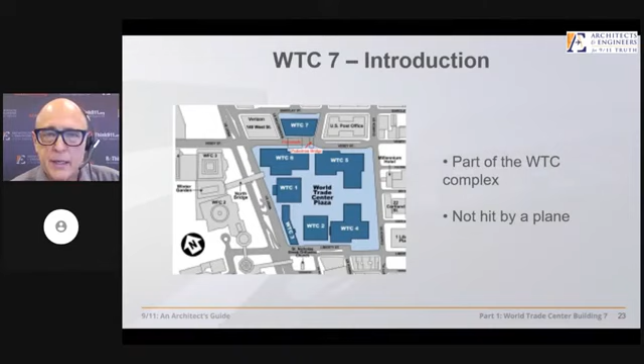It's a 47-story skyscraper, about a football field away from the North Tower. It was not hit by an airplane. This is not an insignificant building. It's the tallest building in most of our states. Here it is, just across the street from Building 6, just outside the zone of the super block called the World Trade Center. But it is part of the complex.

Now, it's certainly a notable building, and as you see here, it is still standing after the collapse of the Twin Towers. It was hit by some of the debris from the towers, and it collapsed nevertheless, as I mentioned, in 7 seconds. Let's just look at that collapse. See what happens here.

And it's 6 seconds prior to the overall collapse. You see the east penthouse collapse, and then the whole building comes down, actually smoothly, uniformly, in terms of its collapse. The internet slows it down somewhat. But we're going to get into this.

But first, what's the official story tell us about this? Here's Shyam Sunder from NIST. What we found was that uncontrolled building fires caused an extraordinary event. The collapse of World Trade Center 7 was primarily due to fire. Primarily due to fires. What fires?

Well, these fires. They're few, they're small, and they're scattered. As you can see, these are the worst fires that we have photographic or video evidence of in these buildings.

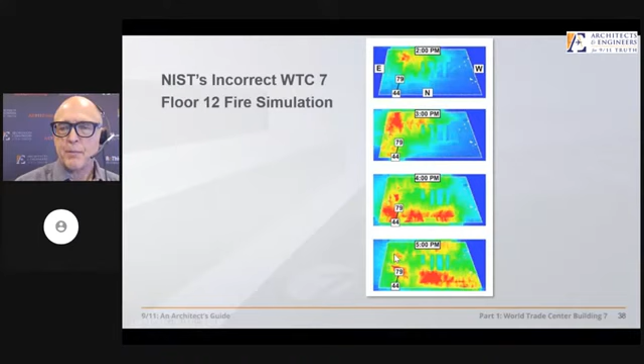That's a problem for a few reasons. One is that they contradict themselves - the fires don't last in any one location for more than 20 or 30 minutes. So how's that fire hanging around column 79? Also, the photos show that fire is gone in that area well over an hour, up to an hour and a half, before the collapse of this building. So fires could not have caused the collapse.

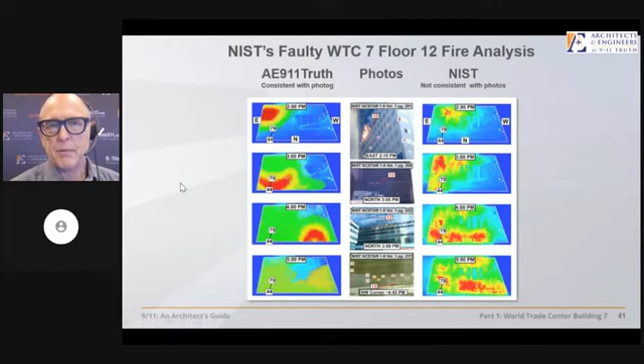More likely, those fires were moving through - they're around column 79 according to the photos about 3 p.m., and then they're moving on. By 4 p.m. they're well toward the west and gone by 5 p.m., which is even 20 minutes before the collapse. So we already have a series of significant problems associated with the NIST report.

But let's go on with the official story here.

Our study has identified thermal expansion as a new phenomenon that can cause the collapse of a structure. For the first time, we have shown that fire can induce a progressive collapse.

Okay, for the first time, a brand new phenomenon. You can see on the screen, the column at the very right is column 79. That's the column that first buckles, causing the floors to come down, followed by a quick succession of failures of adjoining columns. So there's a whole series of events that happen here around the 12th to 14th floor that cause this collapse. What's their theory?

These long span beams are heated up for the hour and a half prior to the building's collapse, pushing this girder off of its seat on column 79, allowing floor 13 to fall on 12, which causes a progressive collapse - 12 on 11, and so on for 9 floors - resulting in the collapse rising all the way up to the top of the building in this instability, and then traveling laterally across the building as it comes down at free fall acceleration, which we'll get to.

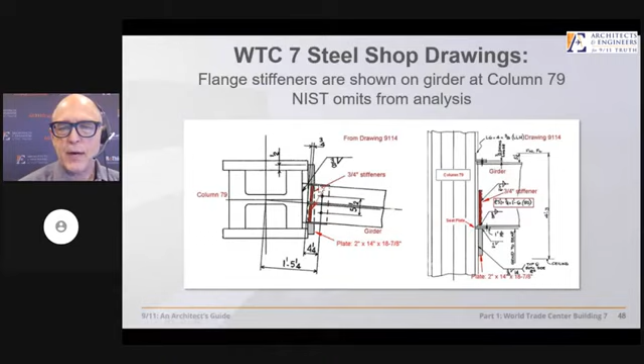Why? Because this side plate here would have trapped that girder because it expands, and it's been shown, as I'll show you at the end of this presentation by Professor Hulsey of the University of Alaska, that this side plate would have trapped that girder from ever coming off. But let's say all that could have still happened.

What do we have next? The 13th floor falling on the 12th. And so...

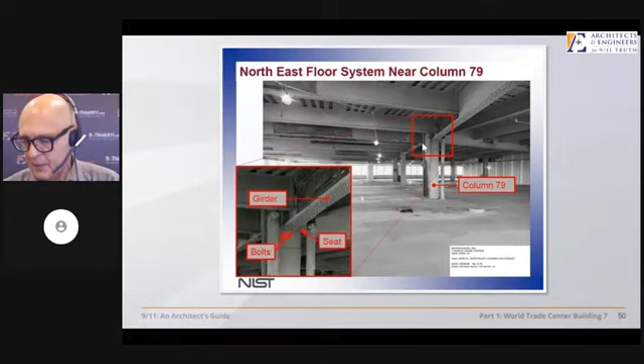And the 13th floor falling on the 12th would not have had even a third of enough shear force to impact the 12th floor below and break that shear connection, because there's a girder just like this on the floor below that it would have had to sever those connections in order to start a progressive collapse.

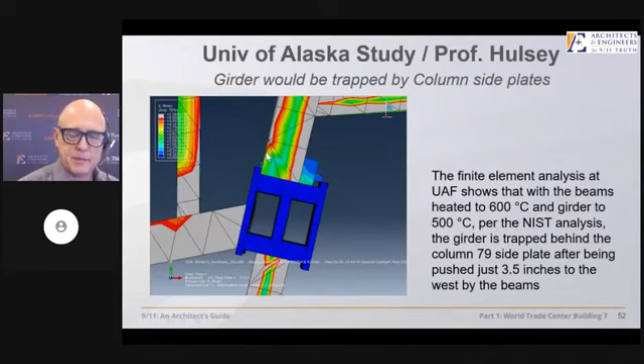Well, that's proven to be impossible by the University of Alaska in a 3-year, $400,000 study by Professor Hulsey, one of the top forensic structural engineers in the country, in which he shows that girder would have been trapped on that side plate because it expands as it's being heated up under the NIST scenario. He shows that indeed these beams couldn't have expanded toward the girder at all, because the heat is causing it to move toward the exterior wall.

We'll come back to that. Again, 632,000 pounds required in a dynamic force to break the floor 12 girder, but we only have 166,000 pounds available to do it with.

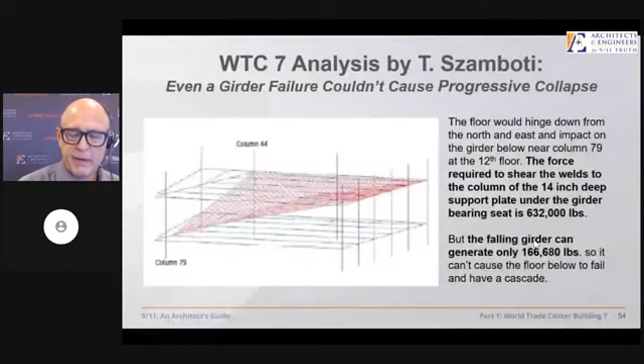And NIST notches all of their beams and causes their almost simultaneous failure in their computer model, in their effort to try to prove their initiation of collapse and total progressive collapse theory. That's how they simulate the fire damage, by destroying all the beams at once. No, fire doesn't do that, though, does it?

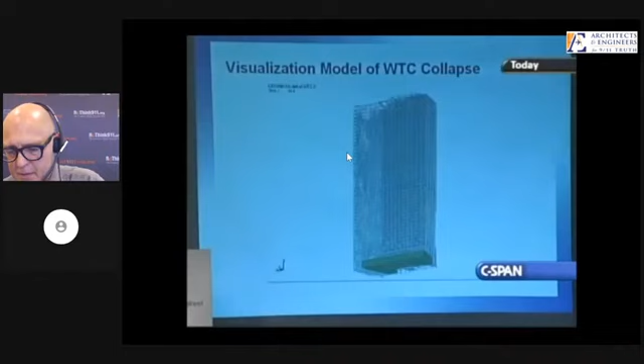Let's take a look at their animation. Here is our structural model showing the building collapsing, which matches quite well with the video of the event. Does it? Well, let's compare it to the video of the event.

Here's the video of the event on the left. The East Penthouse comes down first, sure enough. But then you have this complete release of 400 structural steel connections failing every second, and then this vertical line of collapse, which doesn't even destabilize on the right side of the building. And so they stop the entire animation just 2 seconds into it. They don't even show us what happened.

Why? Well, it begins to tip over. It begins to crumple like a beer can. It looks nothing like the video. So they have to stop it. So we'll show you what a real finite element analysis study looks like.

We test the hypothesis with experiments, analyze the results, draw conclusions. If the hypothesis is corroborated, we report the results in an open, transparent manner so all can build on the body of the work that we're doing. If the results are not corroborated, we go back and construct another hypothesis based on the actual research that we're doing, the tests, the experimental data.

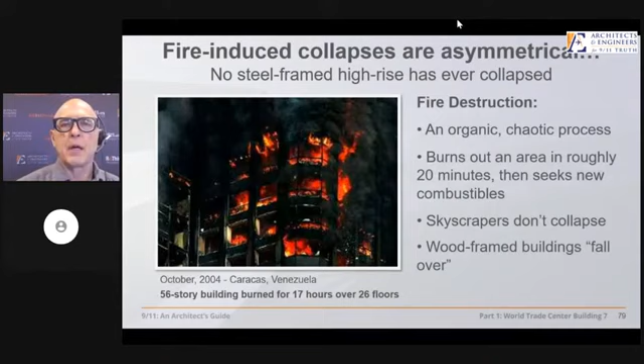Let's begin with a look at what are the forces that destroy buildings. Certainly fire can destroy buildings—not high rises, not ever before 9/11, but say in a wood frame building. This is an organic process. Fire is chaotic, following the laws of entropy, increasing disintegration, burning out an area in roughly 20 minutes or so, moving on, looking for fresh new fuel sources. So in a wood frame building, which we have lost plenty of by fire, it falls in stages, hesitating when it meets the cold, hard structure below, and then maybe there's an additional collapse. It's not a uniform, straight-down, through-the-path-of-greatest-resistance type of collapse.

What about fire in steel frame buildings? Well, guess what—the largest test of its kind was done in the United Kingdom: an 8-story building built just to burn it. It had fireproofed and some non-fireproofed beams in it.

Had a huge amount of kindling to simulate the worst case fires, achieving 2,000 degrees. Jonathan Barnett says this is the best test of its kind, but it showed what?

It showed that the beams did not fail, even when they were not fireproofed. They merely sagged, as they can do when they reach the critical 1200 degree Fahrenheit temperature. The summary of this report states that this is an inherently stable behavior due to the highly redundant nature of the structural steel form, again even when the beams are not fireproofed.

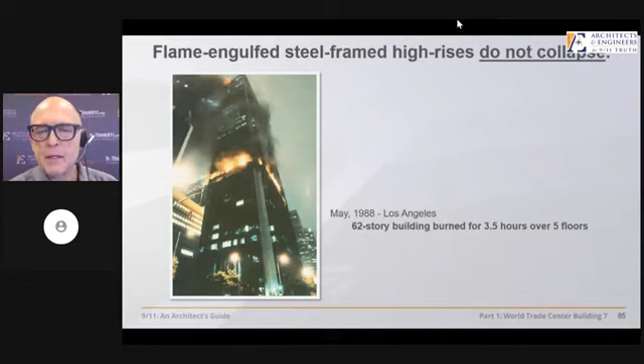Well, what about skyscrapers that do have fireproofing? They don't collapse. Not in Los Angeles, this 62-story building burning 3.5 hours over 5 floors, the First Interstate building. Philadelphia burning 18 hours over 8 floors. Or Caracas, Venezuela, burning 17 hours over 26 floors. No collapse. Not even in China, in this 44-story conflagration in 2009, do we have a collapse, burning from top to bottom.

Before on the left, after on the right. Slightly toasted around the edges, remodeled, put back into use. No collapse before 9/11 by much hotter, much larger, and much longer lasting fires in these buildings.

Steel framing can sag in a building, particularly when it's not fireproofed, as you see here. They can even collapse if you have a lot of incredible fuel loads, like in a factory, for instance. We've lost some steel frame factories, but they're not fireproofed either.

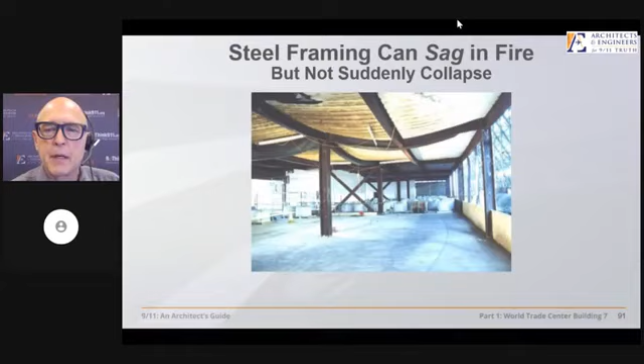This is one of the reasons that we have 5 fire commissioners, led by Christopher Gioia in the Franklin Square, New York area fire district, demanding a new investigation of the destruction of these buildings. First elected body in the history since 9/11 to demand a new investigation based on the evidence that you're seeing today.

Now let's look at buildings that do collapse due to natural events, unplanned events. The building is recognizable as a building at the bottom. Remember that, because we'll be looking at the pile of Building 7 soon. The concrete is not pulverized to a fine powder. The columns and beams are not severed one from another. This is a natural collapse, like we're told Building 7 was.

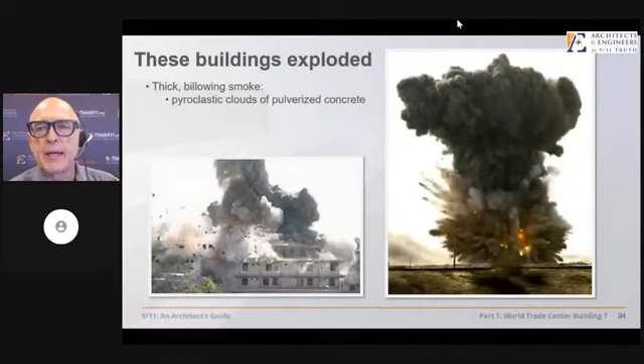How about buildings that were exploded? What happens to them? Well, we have thick, billowing, enormous pyroclastic-like clouds with incredible heat from the release of the gases in these buildings, in these explosions, chemical reactions. A clear line that's expanding outward in these cauliflower-shaped forms with a solid, defined edge. It's not a wispy cloud like when you don't have a lot of heat. So this is caused by incredible heat. You have sounds of explosions heard by witnesses, and flashes of light that are seen by witnesses.

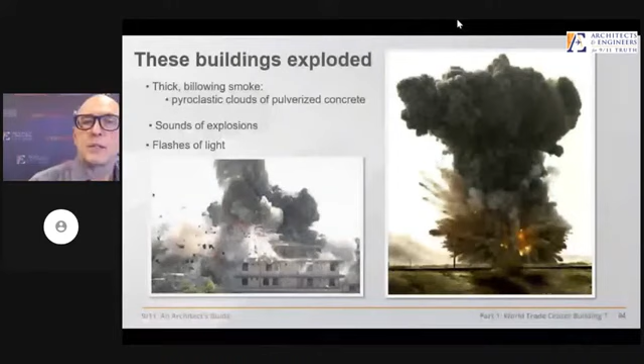Let's look at a controlled demolition where explosions are harnessed quite effectively to bring down these buildings, because we have only a handful of companies in the United States that can accomplish this feat. They place thousands of cutter charges throughout the columns and beams in the building and detonate them in a very precise order to achieve the results that they want, which often include a free fall acceleration and symmetry.

Well, let's look at this set of features that are fairly typical. A sudden onset of destruction near the base of the structure, a straight down symmetrical collapse, if that's what they want to achieve, because of the patterned removal of columns. That's how you get that, resulting in a free fall acceleration, as fast as a bowling ball falling out of the sky, or nearly so, if that's what they want to do.

But it's certainly capable of doing that, and has in many cases, through the path of what should have been the greatest resistance, the thousands of tons of structural steel along that path, resulting in the total dismemberment of the structural steel frame and limited damage to adjacent structures. That's one of the goals of controlled demolition.

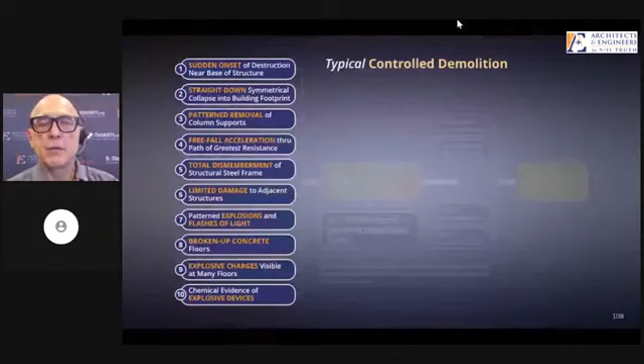With explosive charges visible at many of the floors, these are called squibs or isolated explosive ejections, heard and seen by witnesses, and chemical evidence of explosive devices and the residue left behind for all to see. So this is direct evidence of destruction with explosives.

Fire doesn't create these features, any of them, let alone all of them. Fire causes structures to collapse asymmetrically, with gradual deformations following the path of least resistance. Remember that, because that's not what we're going to be seeing in Building 7's collapse today.

With government documentation, you can't just go out and bring a building down in the middle of the day. It takes months of preparation and approvals, of course. So we have foreknowledge of the destruction, people who are aware of the collapse in advance. That becomes critical, as you'll see later on today. Experts agreeing, hey, that's a controlled demolition.

Well, at least those experts that are not wedded to their financial and political obligations that might keep them from an objective opinion in the matter, like whether this is a controlled demolition or not. With video documentation, of course, all this can give us proof of controlled demolition.

So let's follow this model into the discovery of the evidence in Building 7 and see what we can come up with. Beginning with feature 1: is there a sudden onset of destruction near the base of the structure?

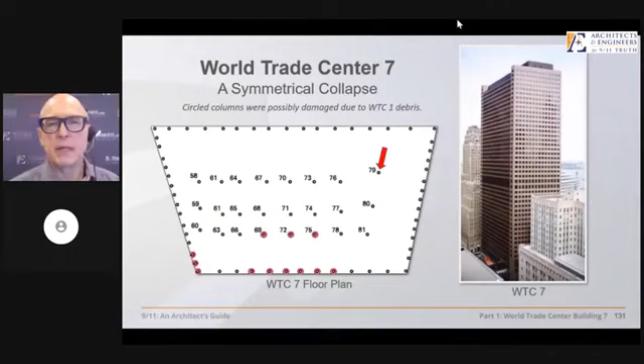Any deviation from that pattern, and the building would begin to tip over. And these fires are going to allow that to happen.

How fast is the building coming down? Feature number 4. Let's listen to David Chandler. Just by watching it, anybody can see that Building 7 fell close to freefall.

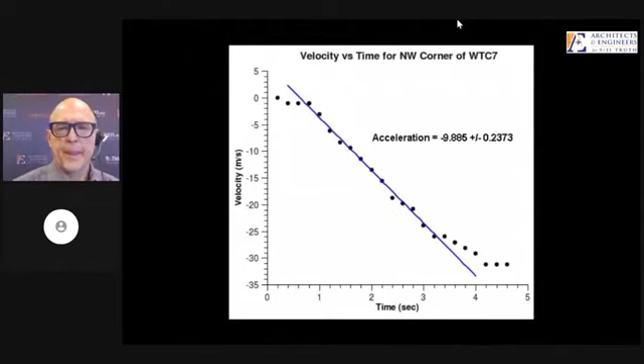To measure it, I used software to track the corner of the building and compute a graph of downward velocity as a function of time. The graph had a long, straight section indicating constant acceleration. Measuring the slope, I found the acceleration to be within 1% of the acceleration of gravity for the first 2.5 seconds. In other words, the building fell through its own structure with zero resistance.

Well, the building didn't have zero resistance. I think there was 40,000 tons. Let's listen to a structural engineer tell us about this.

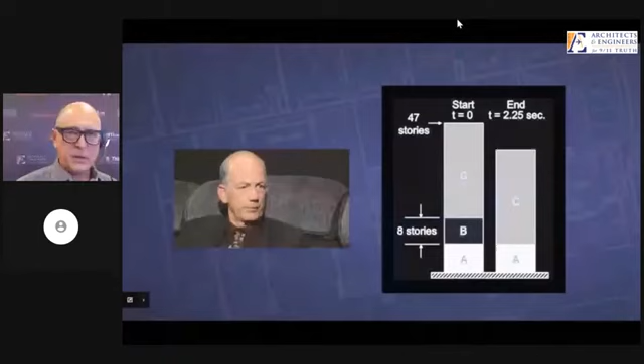This building had 40,000 tons of structural steel in its structural system, and that is intended to keep it from going anywhere. NIST is telling us that the building below it ceased to exist for the first few seconds of the collapse of the building. Well, things in physics just don't cease to exist and cease to resist the forces that are on them.

The building didn't disappear so the building can fall for 100 feet at free fall speed. That's impossible. That's a violation of the fundamental law of physics that says that for every action, there's an equal and opposite reaction. Well, NIST was embarrassed publicly in a press conference by members of AE 911 Truth to admit and acknowledge that it did come down, in fact, at free fall acceleration, which they had been denying for the 7 years prior to that conference.

They said, well, gosh, if it was coming down in free fall, that would mean there'd be no structure underneath it. Right. But in their final report, after being forced to acknowledge this, that it came down for a third of its 7-second fall at free fall acceleration, then they don't acknowledge the implications of that.

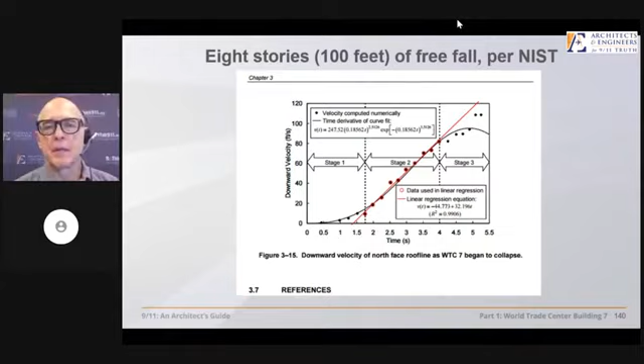Well, how does that happen? What happened to all the columns? What happened to the structure? How was it all of a sudden not there? No mention. Well, here's a clue.

Feature number 5, the total dismemberment of the steel frame. We had a 47-story moment-resisting steel frame skyscraper where the columns and the beams are rigidly welded to each other, most of them. And yet it falls like a house of cards, one column from one beam and every column from each other are severed such that it can fall into a pile about 4 or 6 stories tall.

Remember, natural collapses due to unplanned events, you have a recognizable building. The columns and beams are not severed one from another.

Is there limited damage to adjacent structures? Yeah, pretty limited. The Verizon building sustained some damage. The post office actually sustained some damage. But the center of this pile is in the center of the footprint of the building.

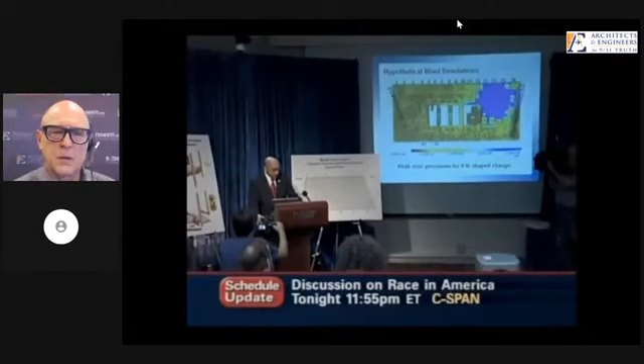What about the witnesses? Well, here's NIST's Shyam Sunder describing there aren't any. We did not find any evidence that explosives were used in the collapse of Building 7. We ran down detailed computer simulations of blast scenarios. This size blast would have produced an incredibly loud sound that was not recorded on videos of the collapse nor reported by witnesses. Well, let's look at a couple of them.

Here is a witness recorded on the radio that day. We were lost in the building actually because it was on fire. The bottom floors of the building were on fire, and we heard this sound that sounded like a clap of thunder. Turned around, we were shocked to see that the building, it looked like there was a shock wave ripping through the building, and the windows all busted out, and it was horrifying. And then, about a second later, the bottom floor caves out, and the building followed after that, and we saw the building crash down all the way to the ground.

A shockwave ripping through the building, a sound like a clap of thunder, windows busting out, and then the building coming down. That's according to Kevin McPadden, former Air Force medic.

Then it was like another 2-3 seconds. You heard explosions, like boom, a distinct sound. It's not like when in compression, like boom, boom, boom, boom, floors dropping and collapsing. This was boom, and you felt a rumble in the ground, like you wanted to grab onto something. To me, I knew that was an explosion. There was no doubt in my mind.

Is there any more? I'm going to call in Bill Rosati. He was here when it all happened, he saw it for himself. Bill, tell us what you saw, what you heard.

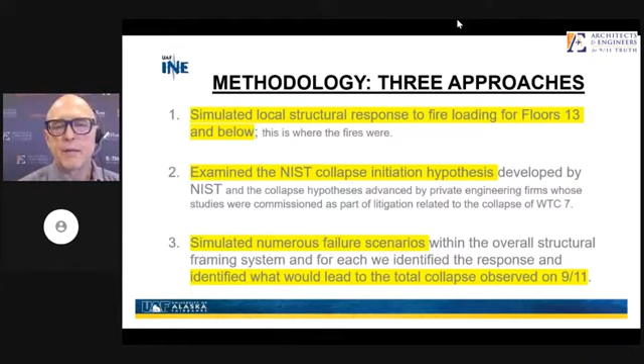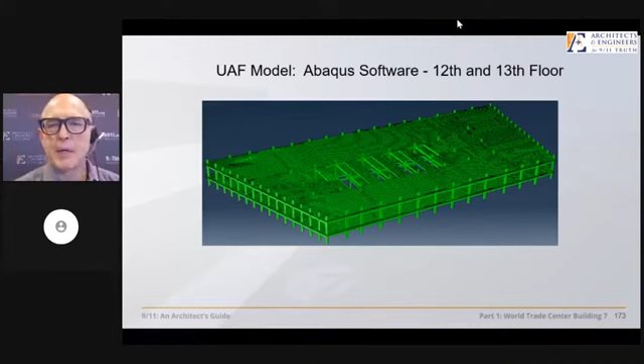But when he goes to examine their collapse initiation hypothesis, the problems mount. He simulates several failure scenarios to identify what could have caused the observed collapse. So he creates these models in SAP 2000 and Abaqus software so that they compare against one another, and it turns out they were consistent.

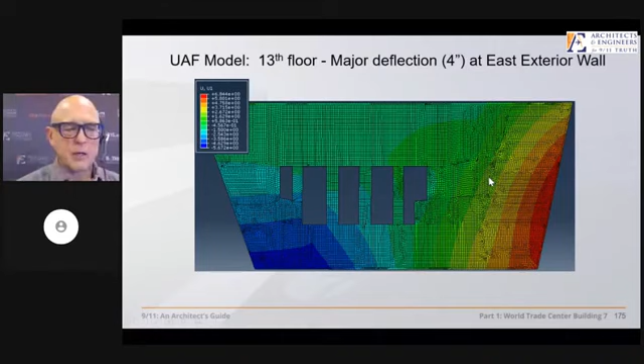Well, wait—they say the girder was pushed to the left off of its seat, but that's not what really happens when you run the scenarios. Well, how did they get that to happen? NIST made the exterior wall infinitely stiff, forcing the movement inside.

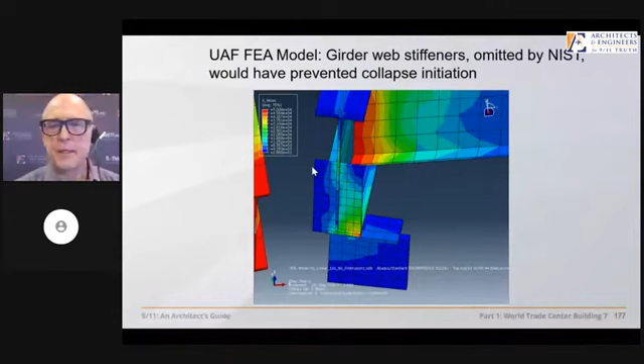Well, the wall's not infinitely stiff. In fact, it turns out to be much less stiff than the centroid of thermal movement, which is closer to the elevators inside the building. So they do some finite element modeling here, and they find again that the girder would have been trapped by that side plate after expanding.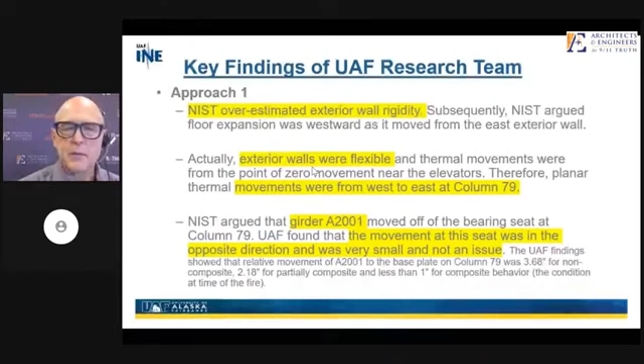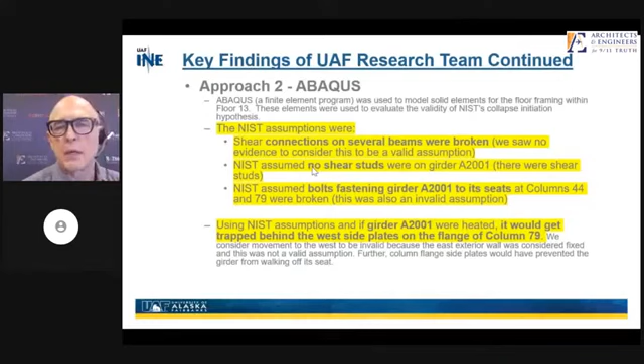So it couldn't have fallen off. They find that the 13th floor couldn't have destroyed the 12th. They find that the movement at the seat was in the opposite direction—a complete reversal of NIST's own findings. And that the shear connections on several beams were not broken, as NIST had claimed—they couldn't have been broken. And that the bolts fastening the girder to the column were not broken, could not have been broken in their model.

So this is the study that NIST was paid to do by Congress, but which failed miserably. And this is their F grade, handed to them by a major university study.

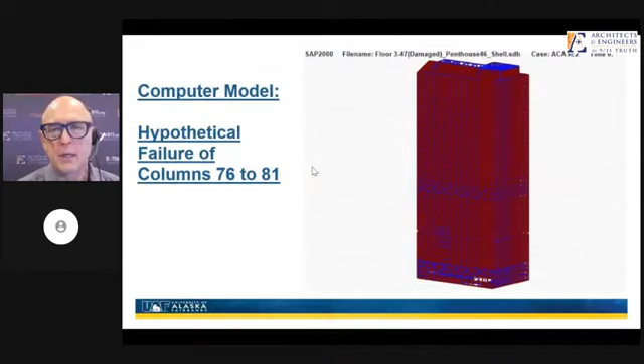They found that columns 79, 80, and 81 did not fail at the lower floors asserted by NIST. But even if they could have failed, they took them out and asked, what would happen if they did fail? The building tips over—it doesn't propagate a progressive collapse down and across the football-field-sized building. What would they find? They find that it tips over, not straight down, when you remove those three columns.

And they find with their SAP 2000 modeling that what brought this down—the conclusion—is the simultaneous failure of all the core columns over 8 stories, followed about a second later by the simultaneous failure of all the exterior columns over 8 stories, produces almost the exact same result as they've seen in the videos. In other words, this result here.

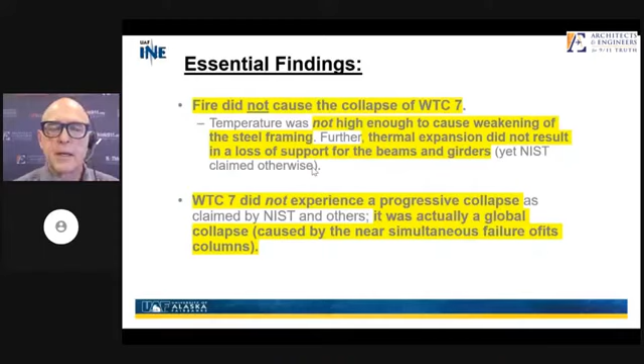That fire did not cause the collapse of Building 7. It's not hot enough to cause the weakening of the steel. The thermal expansion did not result in a loss of support for the beams and girders. And Building 7 did not experience a progressive collapse, but a global collapse.

No. It's an elaborate fabrication, a Potemkin village. And you paid for it.

And that's why 3,000 architects and engineers are demanding a new investigation. That's why the fire district of Franklin Square and Munson, near Queens, is demanding a new investigation, inspired by the loss of two of their own.

They became the first elected body in the country to adopt a new demand, a new investigation. You better believe that when the entire fire service of New York State is on board, we will be an unstoppable force.

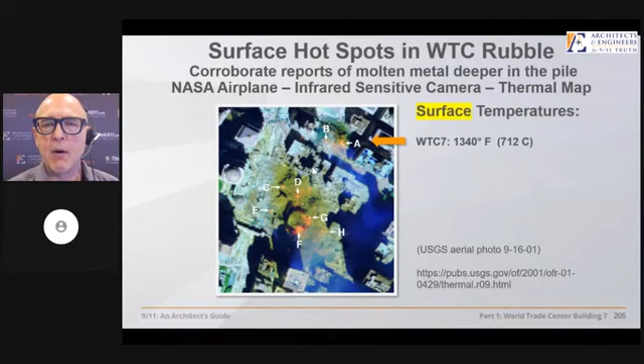Feature number 9, let's look at that heat because it is fascinating and persistent and hot. Here's Building 7 up top, 1,340 degree temperatures at the surface. Well wait a minute, there's no fire at the surface. What are we measuring? Surely those few small scattered fires were extinguished when the building collapsed. But no, something else is going on here, much hotter, much deeper down beneath the surface, which is radiating up and cooling by the time it gets to the surface down to 1,300 degrees. Well, how hot was it? We'll find out, because these hot spots are much deeper down in the rubble.

Let's listen to Abolhassan Astaneh-Asl from UC Berkeley, professor. 'I saw melting of girders in World Trade Center. I saw melting of girders.' What can melt girders? Temperature's a whole lot hotter than office fires. We'll get to it because he says these are the World Trade Center steel that he saw melting.

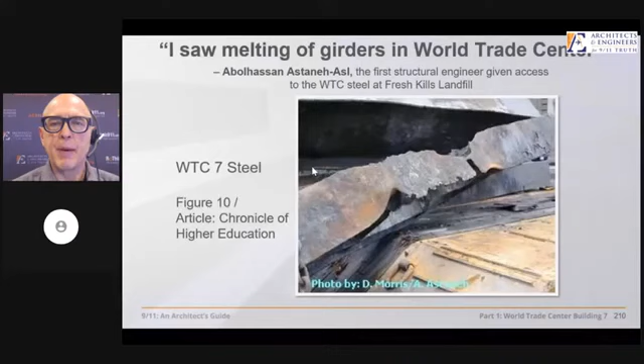He took this picture, he's aware of it. He thinks it melted down in the pile, as if there's some force that could do that. Well, the FEMA author of the Building Performance Assessment Report that came out in May of 2002, Jonathan Barnett, says steel members in the debris pile appear to have been partly evaporated in extraordinarily high temperatures. What can do that? That's 4,000 degrees, 4 times hotter than the hottest office fires.

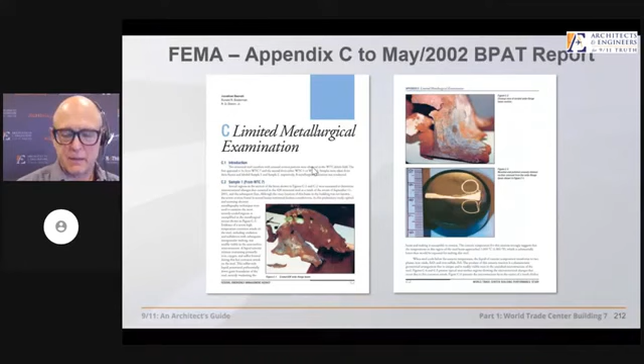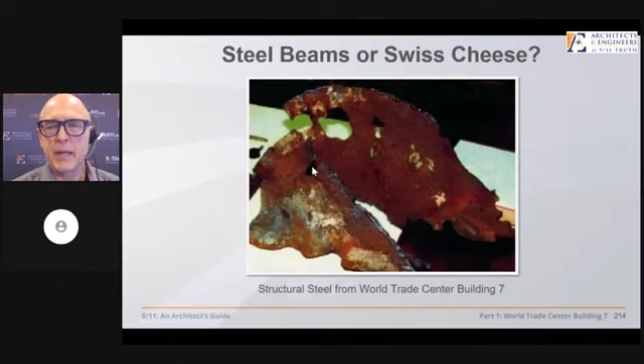FEMA produced Appendix C, a metallurgical examination of the steel. What did they find? Never before observed eutectic reactions, intergranular melting, capable of turning a solid steel girder into Swiss cheese. What can do this? The firefighters have never seen this before. It takes 2,800 degrees to melt steel, 3 times hotter than the hottest office fires.

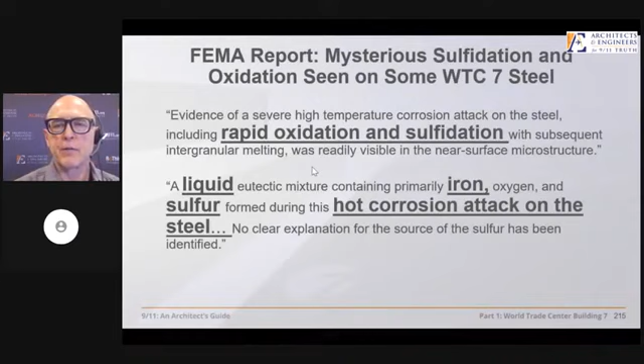Or so, rapid oxidation, sulfidation. How does that happen? Liquid iron, that's molten iron, and sulfur formed during this hot corrosion attack on the steel. No clear explanation for the sulfur has been identified. Where did the sulfur come from? Stand by, they call this the deepest mystery uncovered in the investigation.

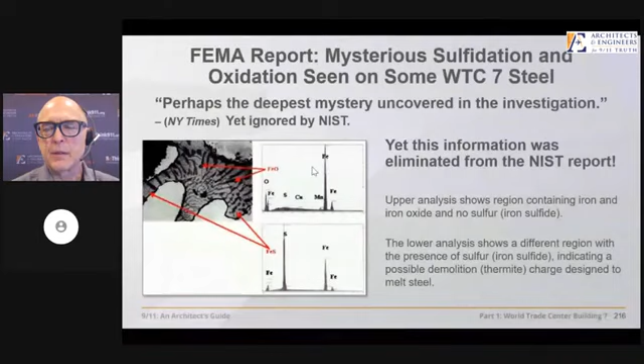New York Times, but it's ignored by NIST. It's not just ignored, Appendix C has been thrown out of the report altogether when NIST took over in 2002. They say, well, we couldn't test the steel from Building 7, there's no steel recovered.

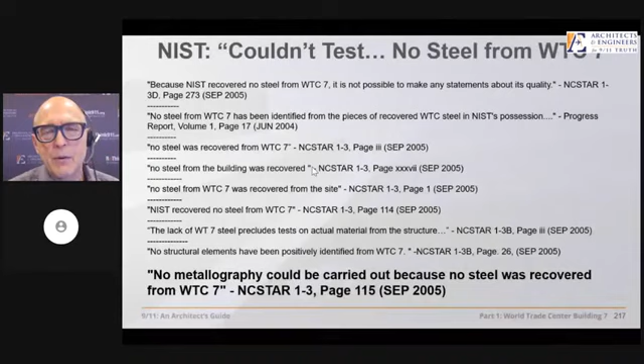The lack of steel precludes tests on actual material from the structure, and no structural elements were positively identified from Building 7 - which is not true at all, because we'll show you a photograph of John Gross, co-project leader of the NIST report, cutting off the very coupon of steel from the Building 7 beam that was handed to FEMA, clearly identified as WTC 7 steel, with silver dollar size holes and partial evaporation in extraordinarily high temperatures, according to FEMA author Jonathan Barnett, fire protection engineer.

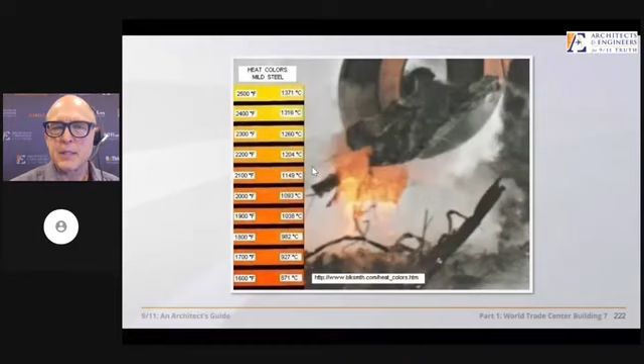They're caught with their pants down. It's a real problem because the fires are only 1,200 degrees, according to Thomas Eagar, supporter of the official story. Hydrocarbons only burn 600 to 1,400 degrees. So iron had definitely melted, as we're seeing here. We can tell by the color of molten metal what its temperature is - in this case, exceeding 2,500 degrees, pouring liquid molten metal out of the materials held in the hands of this crab claw excavator.

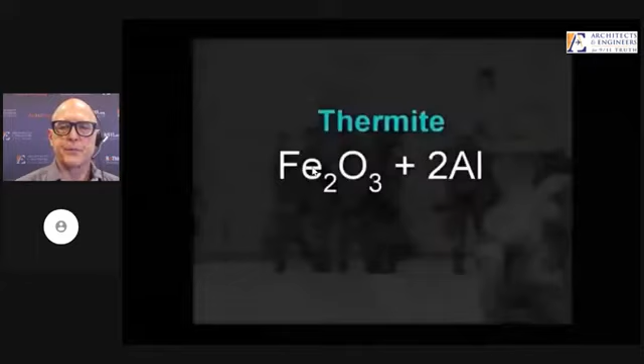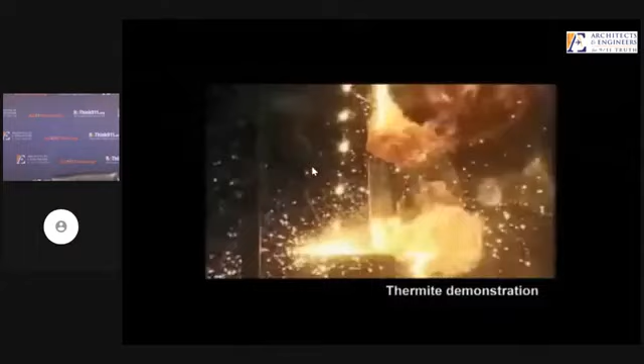Well, what caused it to melt? Let's look at feature number 10, forensic evidence of thermite incendiaries. Could thermite have produced all that metal? Well, what is thermite anyway? An incendiary used by the military, thermite is a compound of iron oxide and aluminum, which when ignited sustains an extreme heat reaction, creating molten iron. In just 2 seconds, thermite can reach temperatures over 4,500 degrees Fahrenheit, quite enough to liquefy steel.

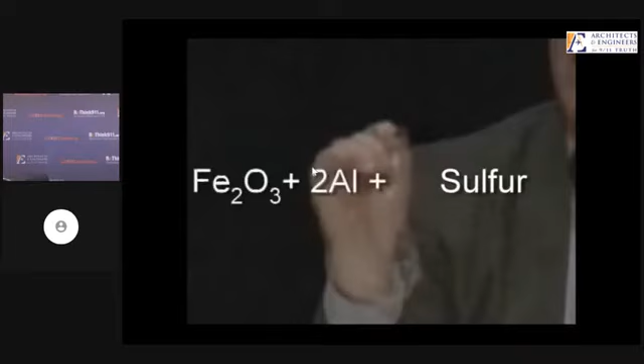We know that open-air fires cannot burn hot enough to melt steel, but metal had melted at the base of the towers. Appendix C of the FEMA report describes sulfur residues on the World Trade Center steel. The New York Times called this the deepest mystery of all. Sulfur slightly lowers the melting point of iron, and iron oxide and iron sulfide had formed on the surface of the structural steel. Sulfur used with thermite is called thermate, producing even faster results.

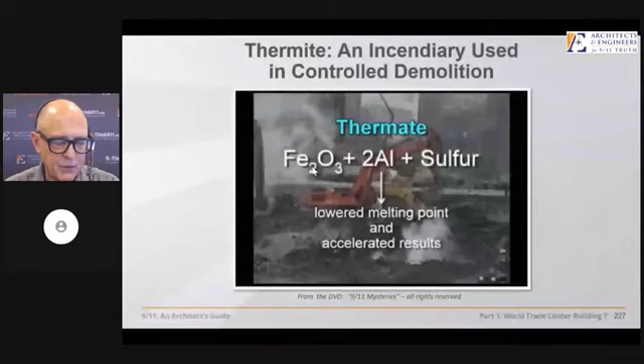So interesting, let's go further. Dare we? Because NFPA 921 says look for unusual residues that could arise from thermite, magnesium, or other pyrotechnic materials. Well, this says they found no corroborating evidence to suggest that explosives were used. Well, wait a minute - did you look? This did not test for the presence of explosive residue. You can't find what you're not going to be looking for, but others did, and it was found.

Stephen Jones is a physicist formerly from Brigham Young University. He looked and found, for instance, in the International Peace Park, where the artist sculptor sent a piece of slag to him, and he examined it very carefully. First of all, he found, gosh, this shouldn't have this jagged edge with this thick slag with aluminum residue hanging off of it. This is what they used at the site - very effective thermal lances and oxyacetylene torches - and they don't leave this kind of residue, aluminum indicating an incomplete chemical reaction of thermite, which is composed of aluminum, which normally turns to aluminum oxide.

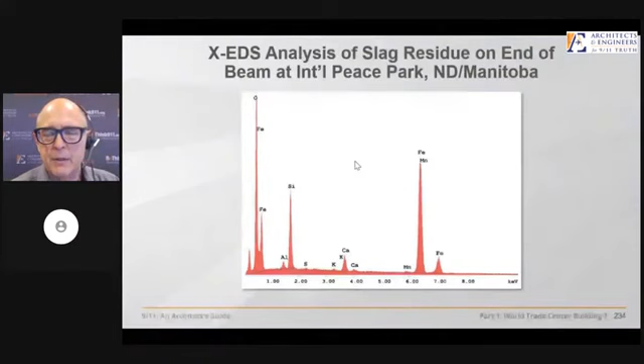So the X-ray energy dispersive spectroscopy tests on the slag find what? They find aluminum, sulfur, manganese - we'll get to that - iron, the ingredients of thermate, which shouldn't be found on the slag on the ends of the beam.

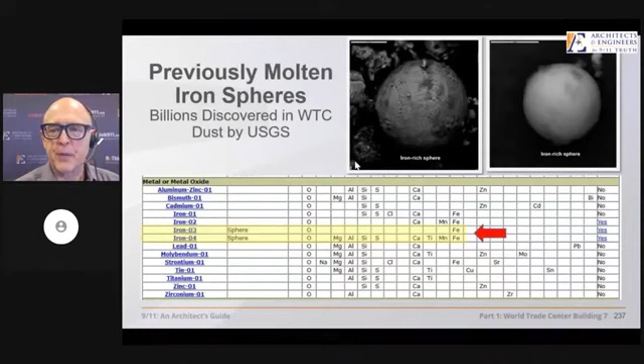Well, what was found throughout all this powder, spread like a river across lower Manhattan, 3 inches thick, mostly concrete powder, by the way, which we'll get to next week. But what was found in it? The U.S. Geological Survey, in their particle atlas of the World Trade Center dust, finds these spheres - what amounts to up to 3 tons of this material. They're invisible to the naked eye. Up to 6% of the composition of the dust is these previously molten iron microspheres.

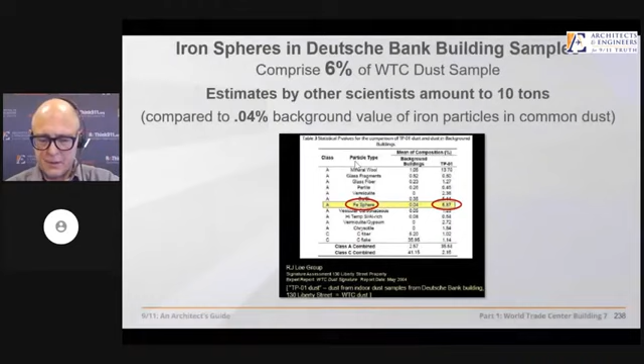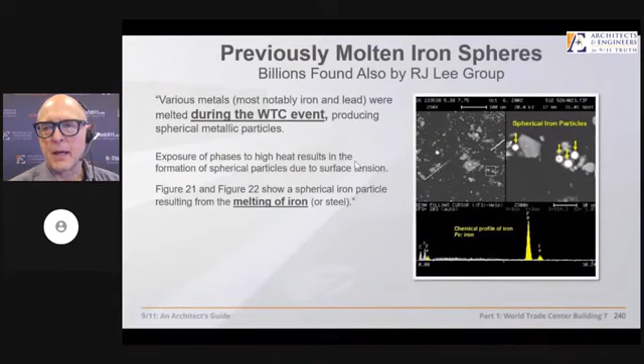There are billions of these things, so many of them. They're used as a signature component to distinguish World Trade Center dust from common office building dust.

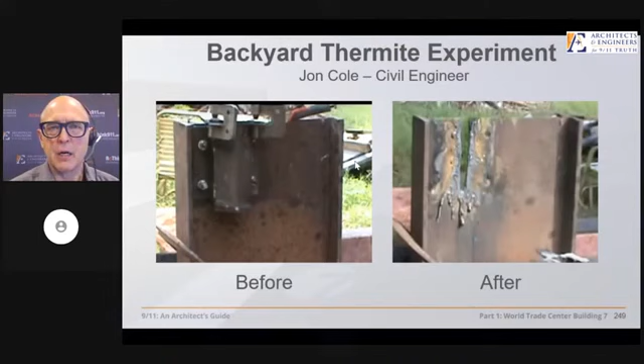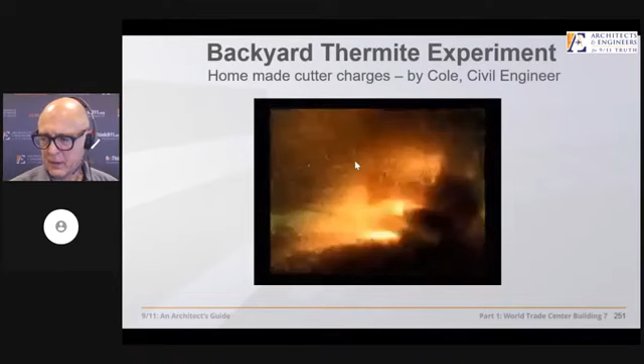So you can make incendiaries from thermate in your own backyard, as the civil engineer Jon Cole did. And it actually cuts cleanly through a lot of those beams.

But why would that want to be avoided in a deceptive controlled demolition? Well, you have a huge audio signature, as Shyam Sunder described earlier, and a huge light flash - whole sets of things that you would want to avoid in a deceptive controlled demolition.

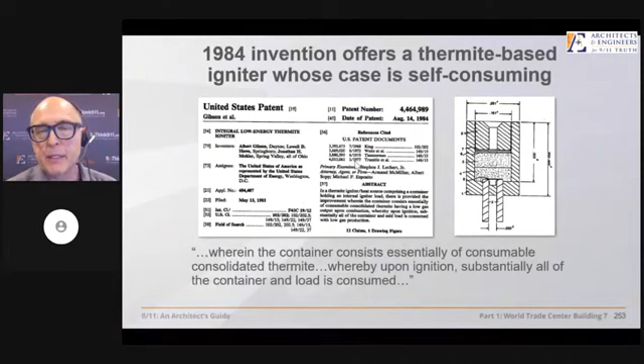So maybe this thermite idea is not so bad after all, if you want to hide what you're really up to. There are devices made with consumable thermite, where all that's left behind is pools of molten iron, which are found plentifully, as you'll see two weeks from today in part 3 of the series, 9/11: An Architect's Guide. But what else was found in the World Trade Center dust?

A team of 8 international scientists led by Niels Harrit, an expert in nanotechnology, examined 7 samples collected and sent to them independently, including one from the apartment of Janette MacKinlay, across the street from the north tower.

Her whole window was blown in and her apartment filled with this dust. It was horrifying. She was there at the time. And she's an artist, so she saved this. She paid for that with her life - she got brain cancer, tragically.

But that sample is one of the four samples which were documented in a peer-reviewed paper. There's up to 10 tons of this material by extrapolation - that's figuring how much was in one set of samples. You can extrapolate to determine the amount of the largest chip of these red-gray chips.

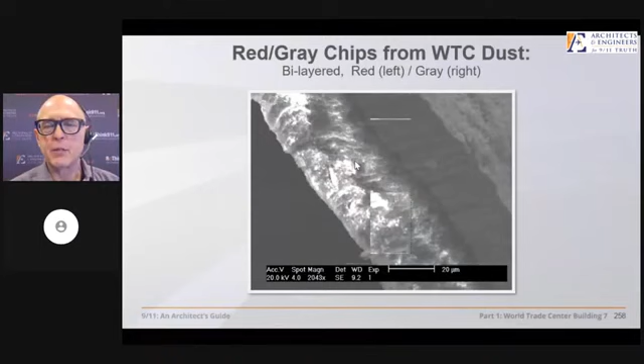These chips come up to a magnet, so they got real curious and analyzed them. They're not paint, though they look like paint. First they thought they were paint, but they zoomed into the red layer and did X-ray energy dispersive spectroscopy analysis, and found that it has the ingredients of unignited thermite.

In the spheres, we found the signature of ignited thermite - there you just have the iron and the aluminum. The unignited thermite, that's what thermite's made out of: iron oxide crystals, or basically rust - not crystals, but particles - and aluminum particles. So they got real curious, zoomed in 50,000 times with an electron microscope, and what did they find?

Particles that are 1,000 times smaller than the diameter of a human hair - iron oxide crystals, aluminum platelets, set in a bed of oxygen, silica, carbon. This is organic material. Organic material is what makes TNT incredibly explosive and powerful, knocks things over. Whereas incendiaries destroy by incredible heat and molten iron.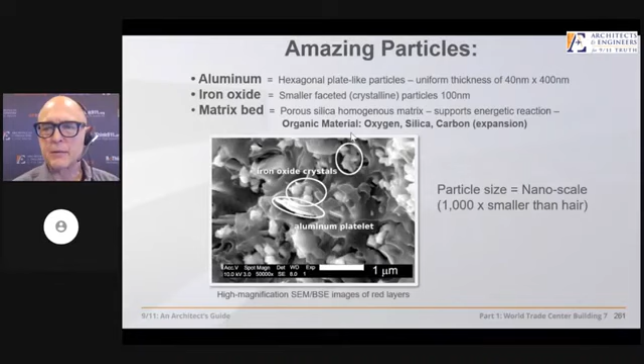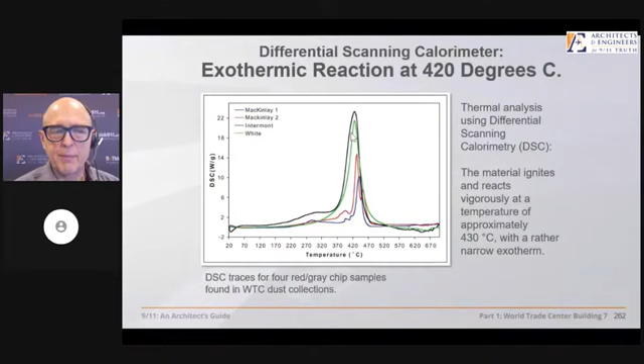When they put these in a heater and they ignite, producing amazing amounts of energy at 420 degrees Celsius, about 788 Fahrenheit, is when they ignite. And what do they produce when they ignite? They produce molten iron spheres.

With the same chemical signature as the molten iron spheres extracted from the World Trade Center dust by R.J. Lee and the USGS. So we know exactly where these spheres came from - they came from these nanothermite chips.

So you see, this is an internally consistent, self-corroborating, repeatable set of experimental data that could be brought into an uncorrupted court system and put a lot of people away for mass murder and treason.

That's why this material, everything you've seen today actually, has been submitted to a U.S. attorney, who has agreed, as you'll see, to follow the law requiring him to give the evidence to a special grand jury for investigation.

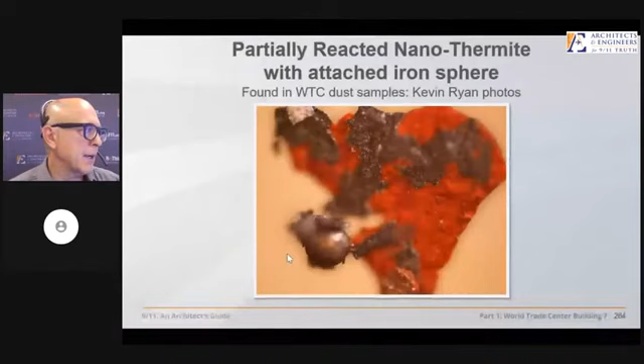As if we didn't know where these spheres came from - they're found attached to partially ignited red-gray chips, as you see here and here.

There's no question this material was developed at Lawrence Livermore Laboratory and Los Alamos Lab. It works because you've got extremely small particles at the nanoscale, which creates an incredibly large surface area and ignites almost all at once. It's an incendiary designed to become more explosive. It's not made in a cave in Afghanistan. It's made only in the most advanced defense contracting laboratories.

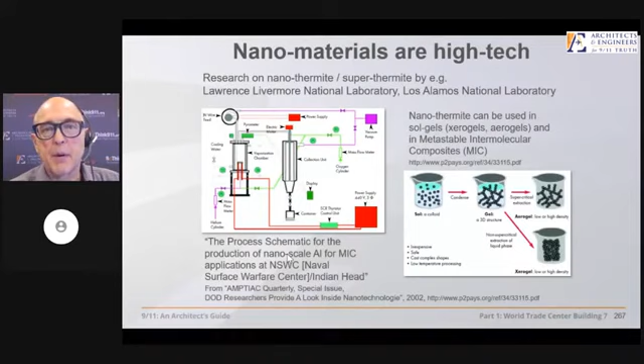So yes, if there's a will to investigate this on the part of our government, then there are plenty of clues to proceed from. This peer-reviewed paper, for instance, is 25 pages in the Bentham Open Chemical Physics Journal, submitted in 2009. It stands uncontested. Nobody submitted a peer-reviewed paper challenging the results of this one. That's how you challenge science, is in the peer-reviewed world.

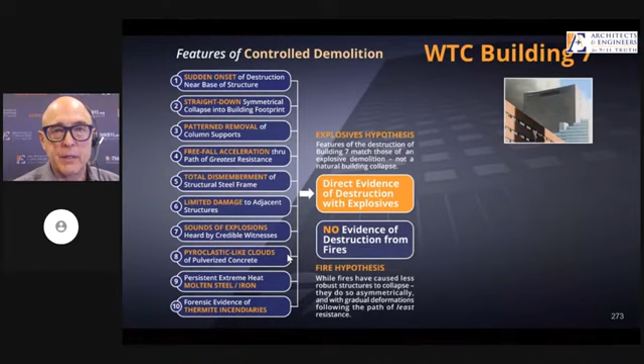So we've shown so far 10 key characteristic features of controlled demolition and some very uncharacteristic features as well. Direct evidence of destruction with explosives, and particularly in this case, Building 7 incendiaries. Fire doesn't create these features, any of them, let alone all of them.

Why? Well, we have, for one, the steel frame conducting and directing that heat away from its source, so it never really gets to its 1200 degree Fahrenheit critical temperature at which steel can lose half of its strength and begin to sag. But we also put fireproofing on these beams, 2-hour fireproofing and 3 hours on the columns, which is a lot more fireproofing than is needed to protect the steel from the 20 or 30-minute fire which can occur, because that's all the fuel there is, even as acknowledged by NIST. So we also keep these buildings from being built out of combustible materials. Skyscrapers have never fallen by fire before, and these are the reasons.

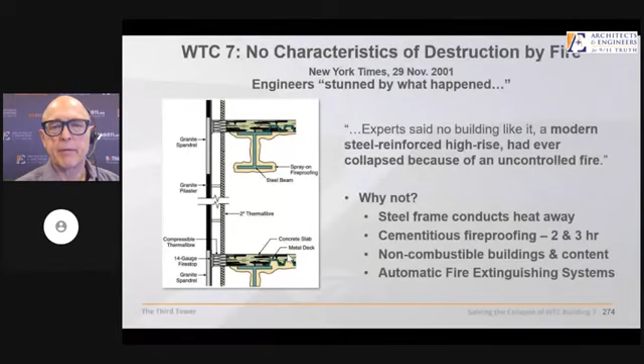And we put fire sprinklers in these buildings to keep that from ever becoming a problem. Well, it didn't help at World Trade Center 5. We have a devastating fire in this building, fully engulfed. Did it come down? If any of these World Trade Center buildings—this is not a skyscraper—but these buildings were to come down due to fire, you'd expect it to be this one. Did it? No, no collapse. They had to bring it down with cables. Yet these few small random fires brought this building down in 6.5 seconds. Makes you think. For the first time ever.

What about the FEMA and NIST reports? Well, we had official investigations beginning with FEMA, which had $600,000 of funding. Their efforts were hampered, though, according to the New York Times. We have no access to the blueprints of the buildings, bureaucratic restrictions keeping them from interviewing witnesses, making forensic inspections at the site, getting crucial information, et cetera, et cetera, et cetera. It was a real problem.

NIST took over in 2002 and produced their final report 6 years later, with a stated conclusion that fires caused the collapse of this building. Well, wait a minute, what? Truthfully, they say when they started this project, we've had trouble getting a handle on Building 7. Yeah, we agree—because the FEMA report says further research, investigation, and analysis are needed to resolve the issue. Unfortunately, for those hoping to resolve the issue, we have a real problem in what was easily the largest and most perplexing structural failure in history.

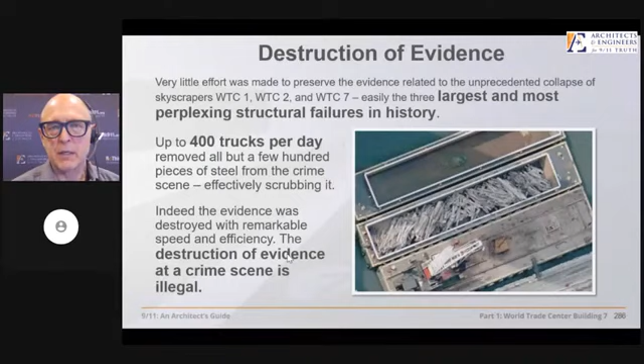We have 400 truckloads a day within 2 weeks after 9/11, starting with Building 7, hauling that steel away before investigators could get their hands on it and do a proper forensic investigation. This is the illegal destruction of evidence in a crime scene. Prompting Bill Manning, editor-in-chief of Fire Engineering magazine, fire protection engineer, to cry out: crucial evidence that can answer many questions is on the slow boat to China, showing an astounding ignorance of government officials to the value of a thorough scientific investigation. The destruction and removal of evidence must stop immediately.

But it didn't. What about the experts? Danny Jowenko, with 27 years in controlled demolition—Jowenko is the expert on this in Europe. What did he say?

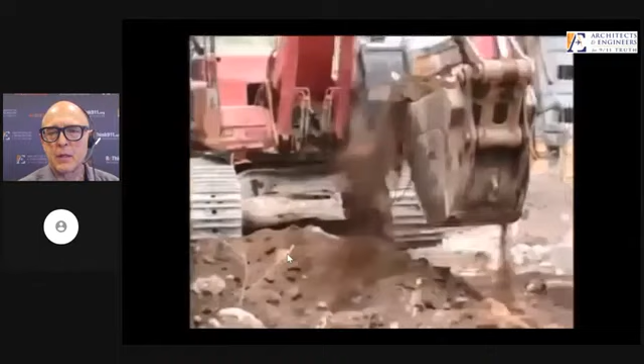I remember getting a call from the fire department commander telling me that they were not sure they were going to be able to contain the fire. And I said, you know, we've had such terrible loss of life, maybe the smartest thing to do is pull it. And they made that decision to pull, and then we watched the building collapse.

Maybe the smartest thing to do is pull it, and we watched the building collapse. Well, he says, I didn't mean pull the building, I meant pull the firefighters out of the building. But guess what? The firefighters were not fighting fires in the building, and that's not how you refer to firefighters as 'pull it.' Anyway, there were no firefighting operations taken by the FDNY in Building 7.

They were told it was going to come down. It had structural damage, so they didn't even fight the fire in the building.

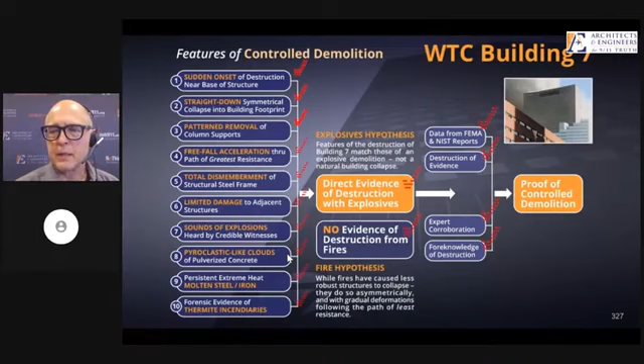So with what we've looked at here, do we have a hypothesis that's corroborated? You get to choose—this is where your analysis comes to some degree of finality. Hopefully we've given you enough information with 10 key characteristic features, and mostly uncharacteristic features, particularly incendiaries and features of controlled demolition, none of which can be accounted for by fire, all of which support the hypothesis of explosive destruction, especially when supported by the circumstantial evidence we've also looked at. Is that to you proof of controlled demolition?

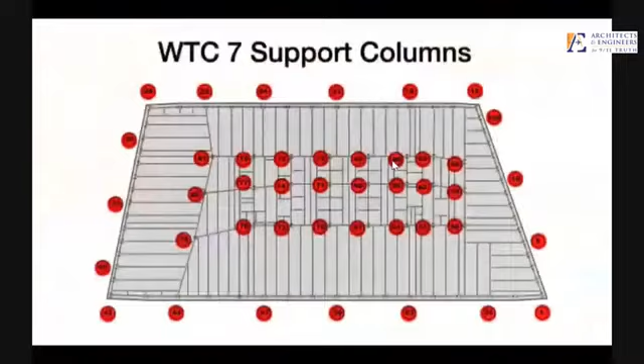They're talking about a single columnar collapse or failure that resulted in a total collapse of the building. Building number 7 descended in free fall for the first 100 feet, meaning there was absolutely no resistance to the descent whatsoever—so all of the columns really needed to be severed at the same time. The symmetry is the smoking gun. NIST has admitted it went into free fall for 8 stories. You don't need to be an engineer or an architect to see what happened to those buildings.

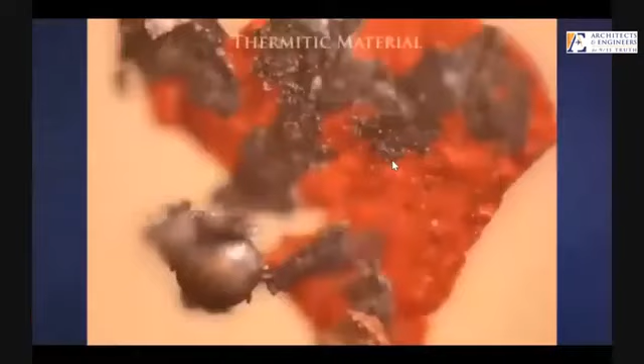NIST excluded the documents from FEMA in Appendix C that documented the evidence of melting steel. In an office fire, you cannot generate enough heat to melt steel. There were iron microspheres present in all of the dust samples. They needed to have been formed in extremely high temperatures. All the characteristics of the microspheres, along with what I see in the attack of the beams that were actually found, tell me that thermite was involved. In the dust, what we have found is a modern version of thermite, which we call nanothermite.

NIST concedes that they found no evidence for explosives. So then we asked them, well, did you look? And they said, no, we did not look for explosives or residues of explosives. And in fact, the evidence is overwhelming that these red-gray chips are very high-temperature incendiaries.

We have watched as scientific integrity has been undermined and scientific research politicized in an effort to advance predetermined ideological agendas. If this is a crime—and I think everybody agrees it's a crime—evidence was removed from the scene of the crime. You can't do science when you are deprived of the evidence, and when your hypothesis is the least valid instead of the most likely. When the most likely hypothesis in the case of Building 7 wasn't even mentioned, this is not science.

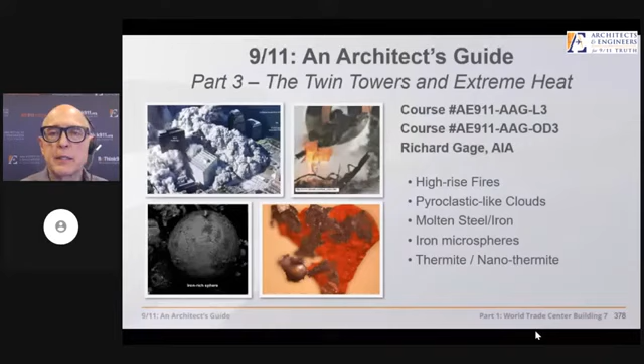Twin Towers and extreme heat comes up in two weeks from today, on Thursday at 1 p.m. Pacific. We'll look at the high-rise fires in more detail—pyroclastic-like clouds, molten steel and iron microspheres, and thermite, nanothermite, which we only touched on today. So come back and join us.